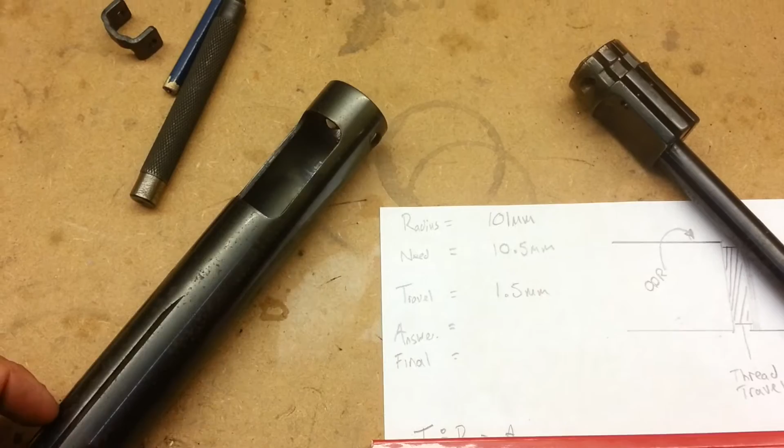How's it going? Today we are going to talk about HW77s. I've had one sort of hanging around in the workshop for quite a while now, and it's just sat there. It didn't have a back end on it, and it's pretty beaten up and pretty ruined, to be fair.

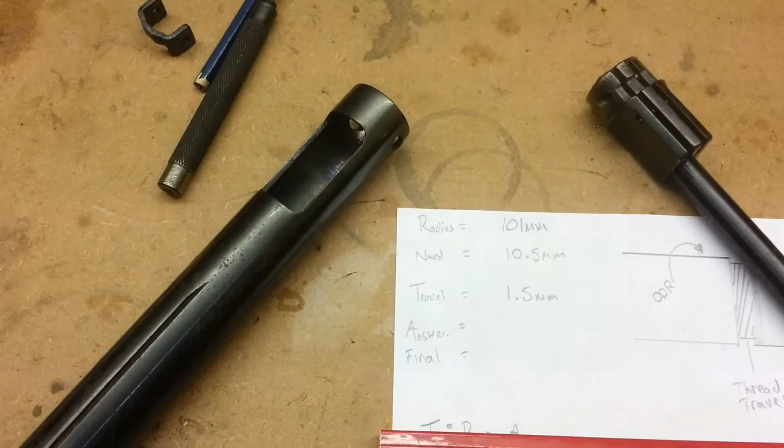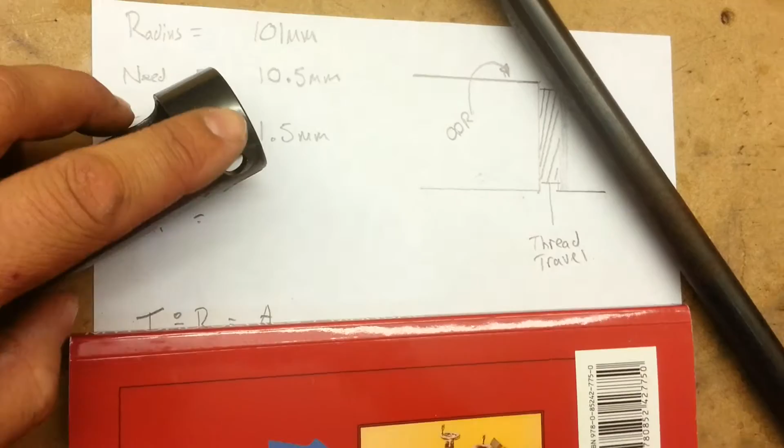So I thought, I know, let's have a go and see if we can pull the plug out. So we did, as you can see, nice bit of drilling through the spot weld, bit more drilling through the spot weld. And then I heated it all up around this area and went to it with a piece of tubing. So that's that bit, battered it out, and here is the actual plug.

Obviously for that I drilled right into it as well, because I didn't know what I'm supposed to be doing or anything. I was a bit bored and I've done my job, so I figured I'd have a go. You can see there how much weld actually touches the inside bit - it's not a great deal, is it? And there I appear to have actually managed to drill it all out, which is pretty good.

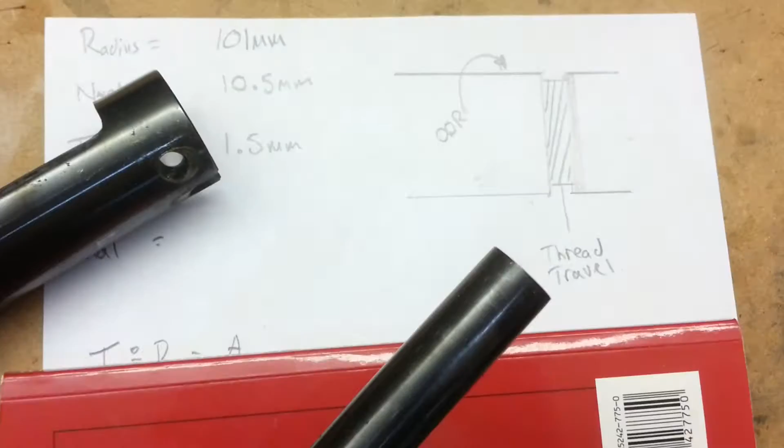And if you wanted, there is the pin right there, so you could pop that out and put a different rebarrel, well, recalibre your 77. So yeah, that's pretty much it. Also, just flatten the end of it off because the crown was all beaten and rubbish, as they normally are.

Perfect, so we're going back on it. Just put a nice 11 degree on it. Probably just going to end up being my rifle I toy with, to be fair.

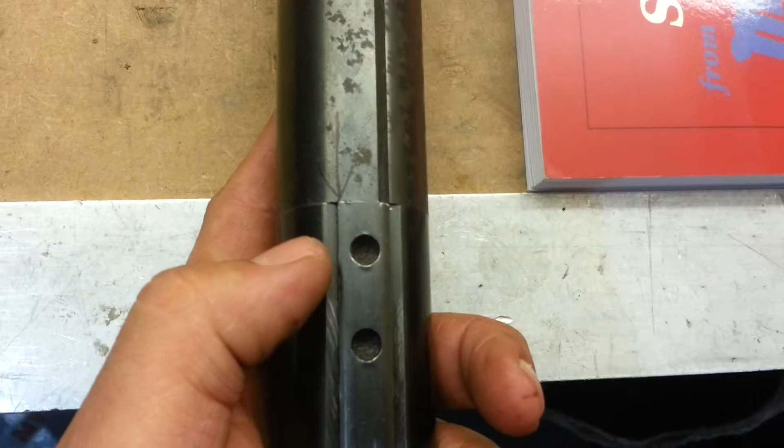Anyway, so as I said earlier, this was just a rifle I had with no back end on it. So I have a spare back end, as everyone does, just sat on the shelf. Now, if you see there, you can see it doesn't screw on because they're all mated together, aren't they? You can't have one back end of one gun on another. Or can you? So that's what we're going to try and find out today.

That's where this one comes up to, and obviously we want it to go all the way round to here. So now I've measured the distance of how far it needs to be, and it is 10.5 mil. So what we need to do is somehow remove some of this so that this gives it enough clearance to spin round. Over to my whiteboard.

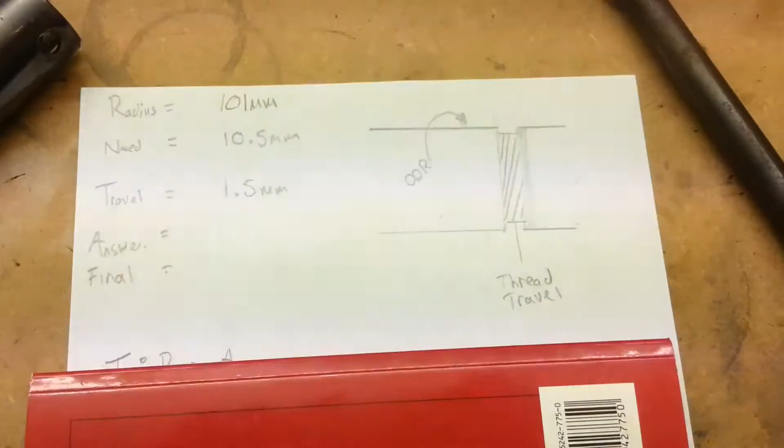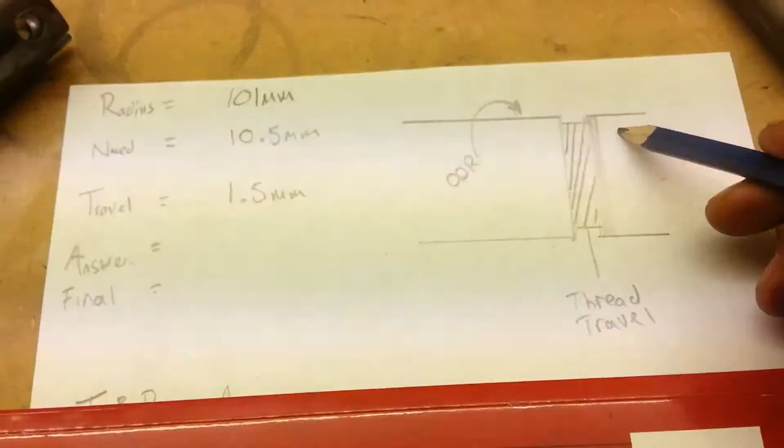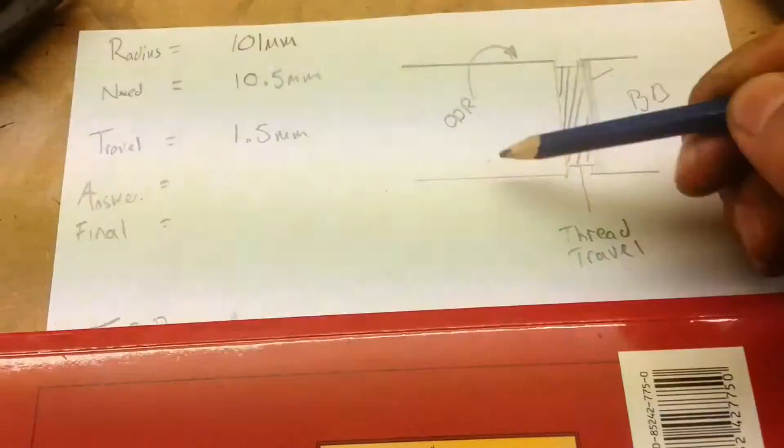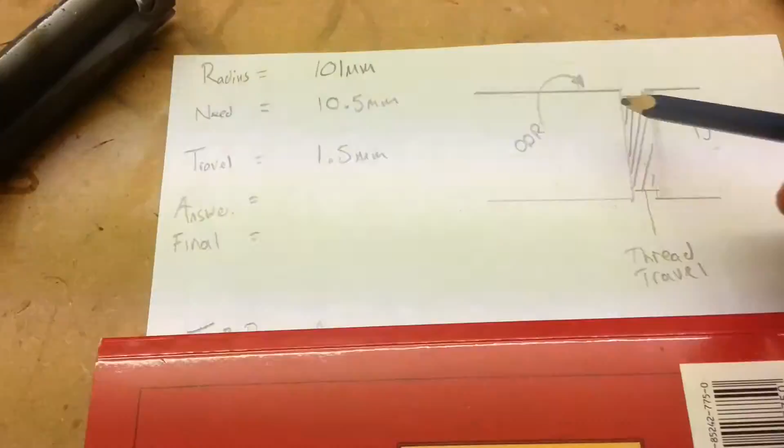Okay, so the overall radius of the back block all the way round is 101 millimeters. To get to where we need to be, we need 10.5 millimeters. The actual thread to do a complete 360 degree turn is 1.5 mil, so 1.5, M32 threads, standard electrical fitting.

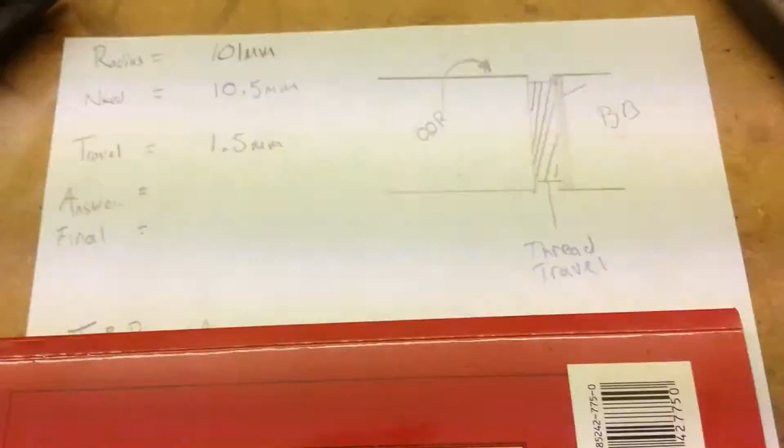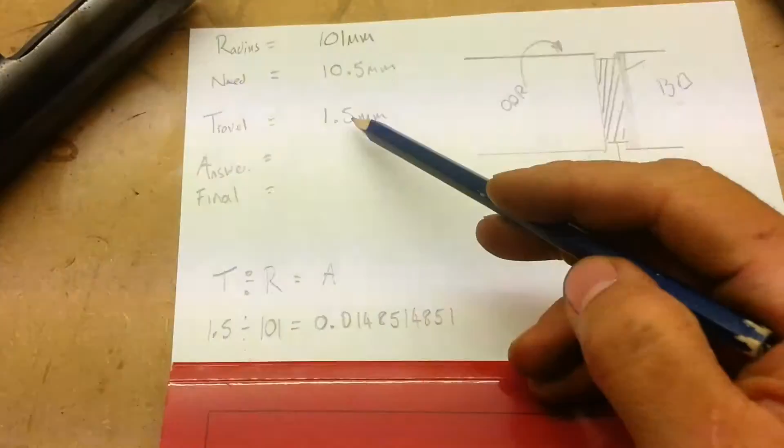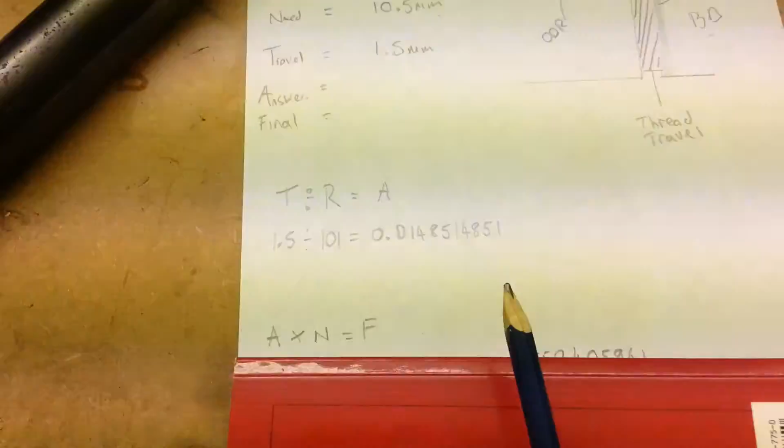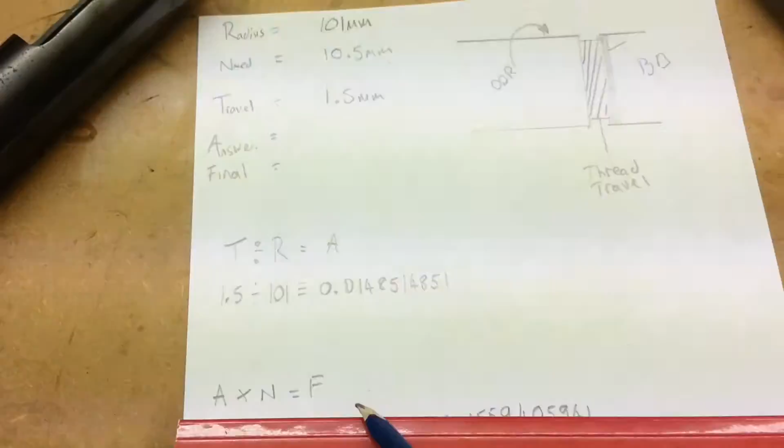So what we need to do is start working it all out and see how this is going to work. So T, here we have travel, it's 1.5. R, radius, 101, so 1.5 by 101 equals this amount, which I'm going to call A. So then A, which is the answer, times by N, which is the need, 10.5, equals F, which put that for final. There you go, answer in final.

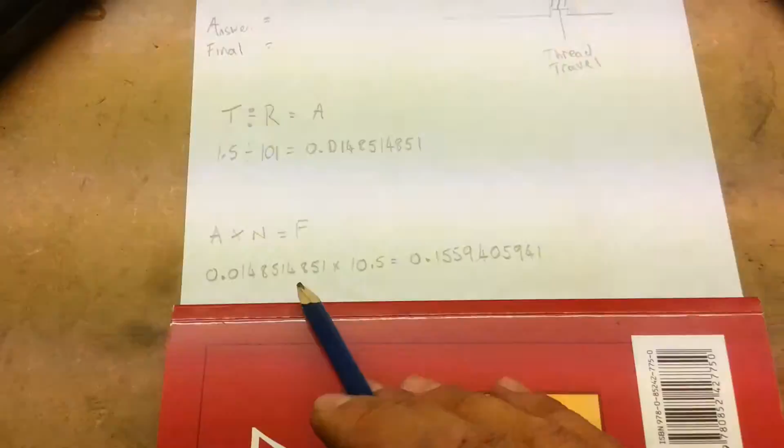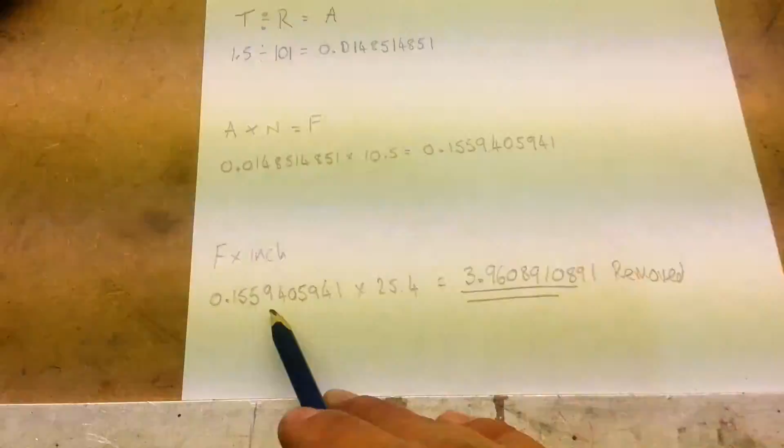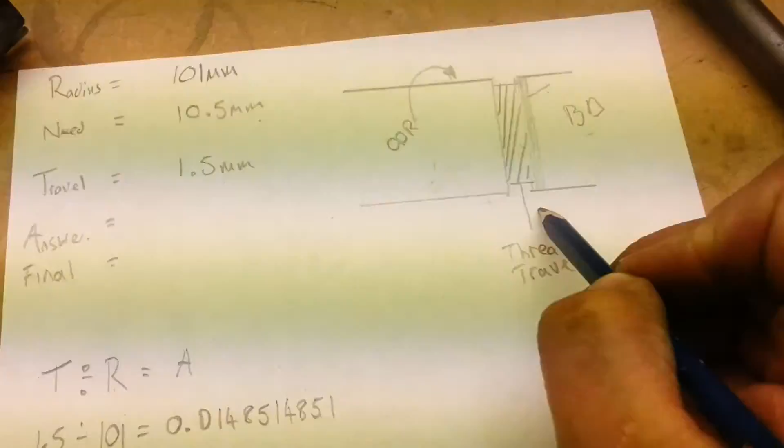So 0.0148514851 times 10.5 equals this. It's all very well and good. So what we need to do now is to change that into inch, because I'm working in mil there because I'm being lazy. So we do F times 25.4 equals 3.96089. This is the amount which we need to remove from here. So we need to get it to be 3.96 of an inch. It's pretty small, isn't it?

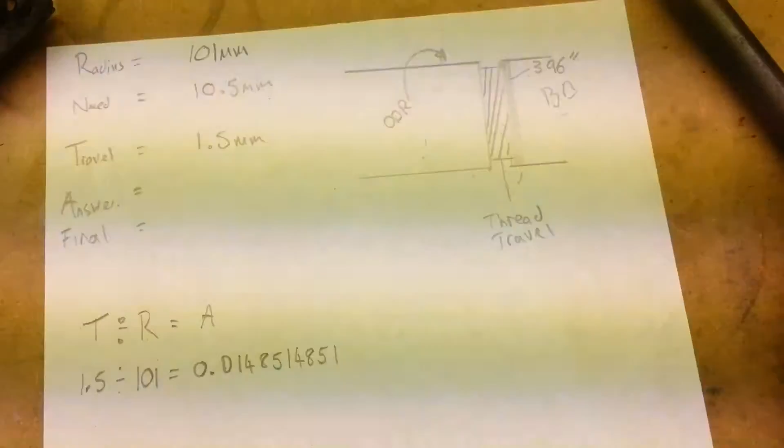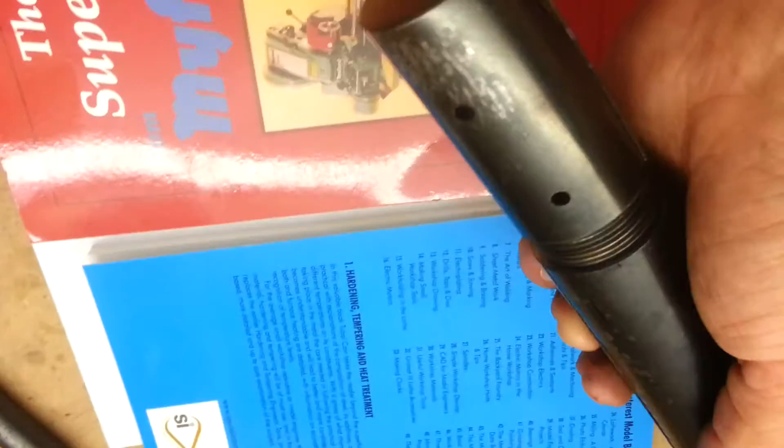So right, we'll have a go. Right, here we are, back in the game. Oh, wrong way round. There we go, right, sorry about that - camera problem, more the operator than the actual item.

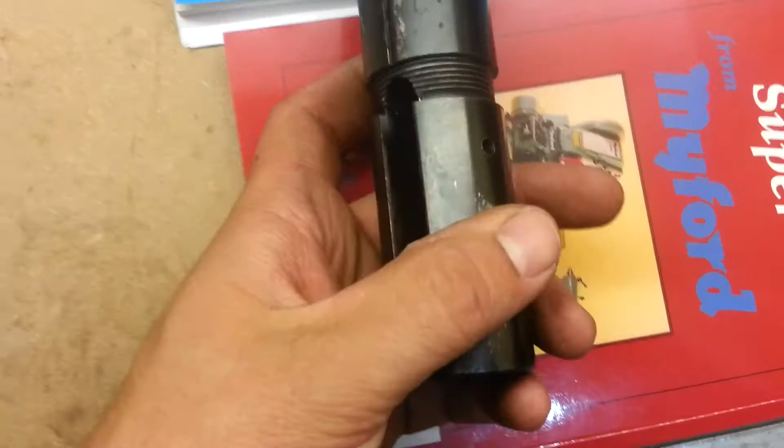Right, here we go, we've just got it out of the lathe, so I don't know if you can see it. We have skimmed the tiniest little bit in there out. I'm not going to lie to you, the 4 thou that we used came very, very close. So in the end, we ended up using 5 thou.

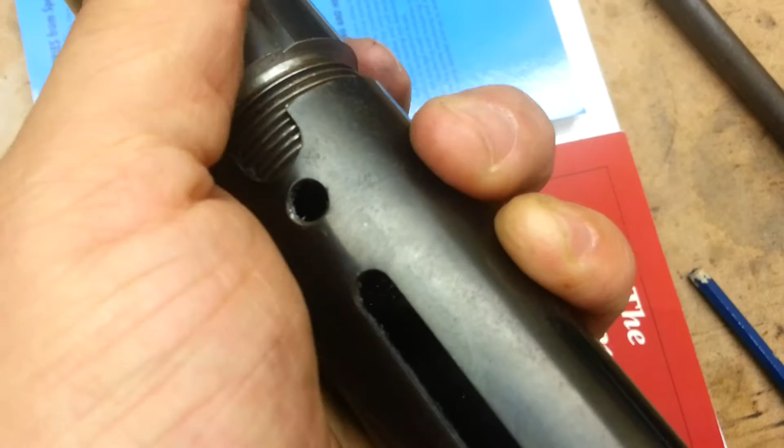So it would go straight on, because 4 didn't fit, so the 5 - sorry I'm rambling here, trying to do it one-handed, it's no good either. There we go, it's just done up loose. If you were to put 2 hands on that, which I don't have available, that would go all the way up, nice tight fit. So you think I'm not messing around? That's the way it was.

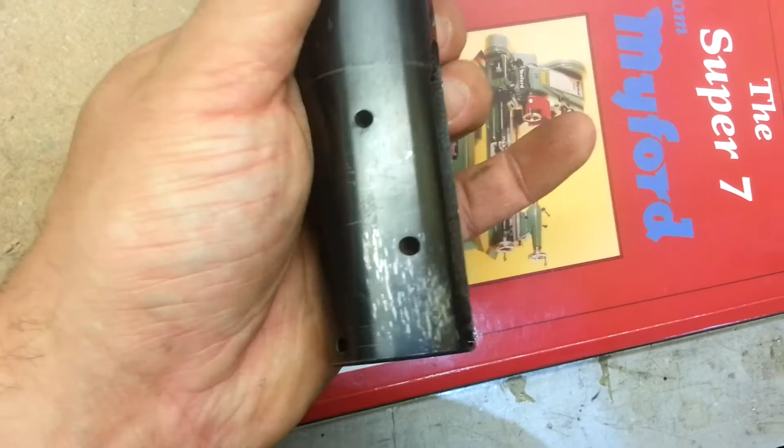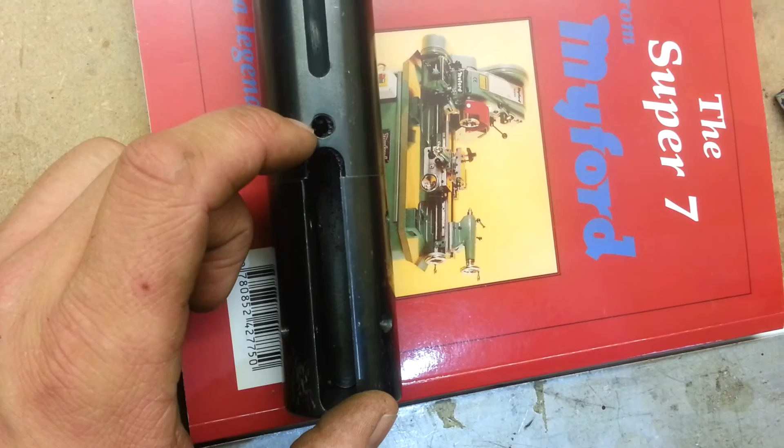You can see this is the old beaten one, which we were using originally. One thing when you do this, I would suggest, if you are going to recycle an old barrel to this back bit to rescue an old project, I would drill this screw hole here out, just take it out with like 7.25, just something just over 7, so that the 7mm metric screw will come straight through the trigger guard and into the base bit, and it will hold on. Otherwise, because this is threaded to its actual back block, which is God knows where. So yeah, there you go.

That's how you make an old block fit on a new cylinder. Thanks a lot.